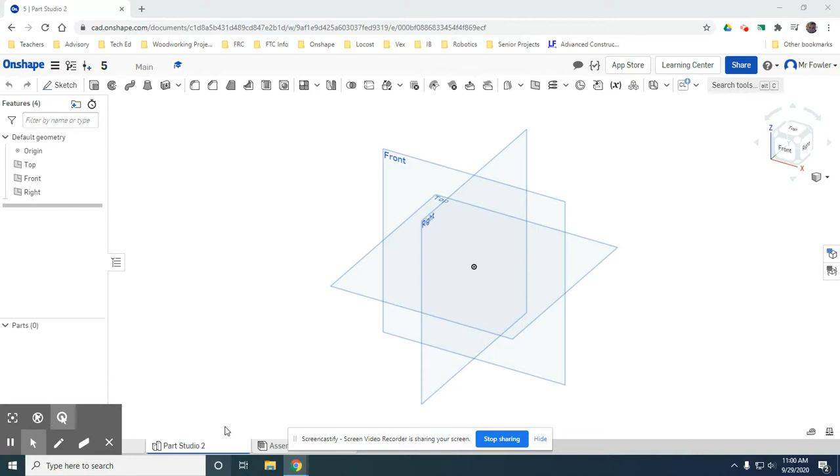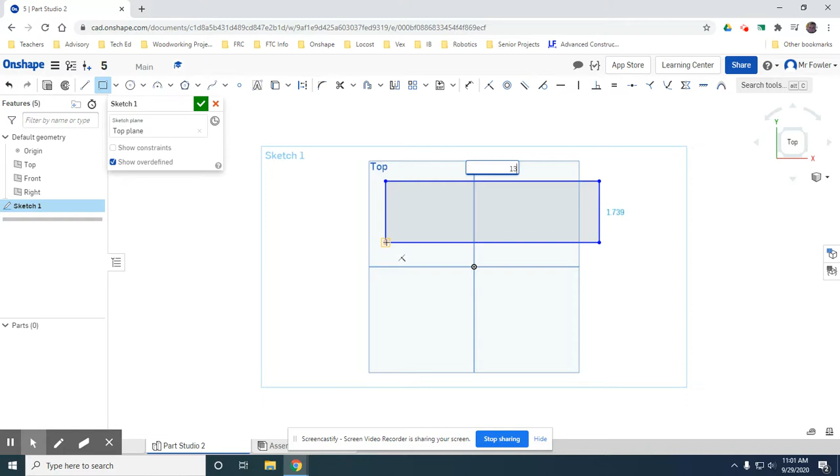Exercise 5 is a slot style bracket with 3 different holes. So we're going to get started today. Sketch, top, and normal to. Okay. Now I am going to start in a corner with my rectangle tool and go in this direction. This is going to be a rectangle with dimensions of 130 millimeters and 40 millimeters.

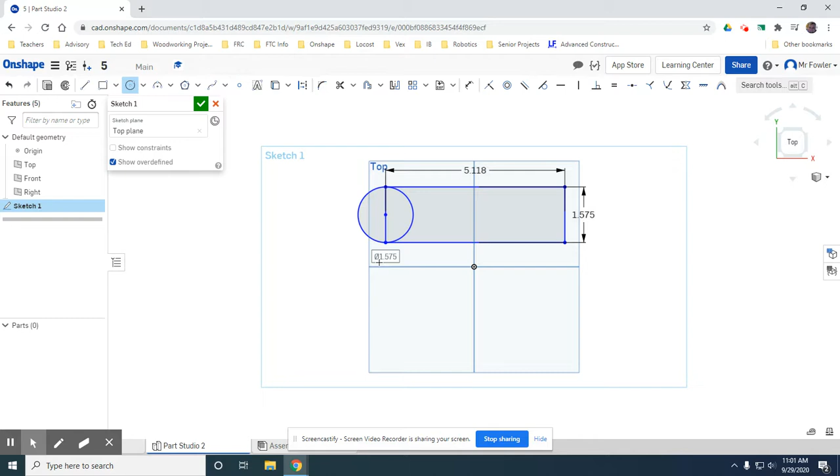Okay, and then on this end here, I'm going to do a circle on my midpoint, and that circle is going to be constrained tangentially to the top and bottom lines. Okay, that will also give me a radius of 20 millimeters. Okay, we're getting an error message here because we are over constrained, so I'm actually going to delete this measurement. Now I'm going to use my trim tool. I'm going to trim away this and these two.

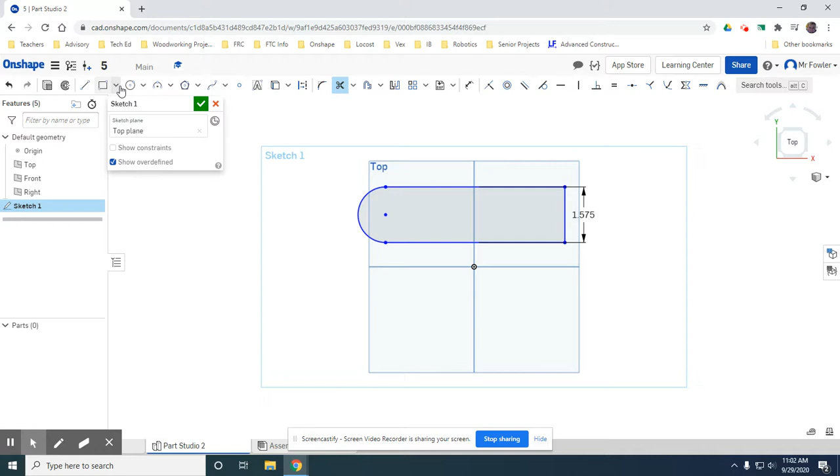Okay, so now I have to do a couple circles in order to create a slot here. The slot has a diameter of 20 millimeters, and over here somewhere we're going to have another 20 millimeter circle. And now we're going to actually dimension this so we can set these two apart a certain distance.

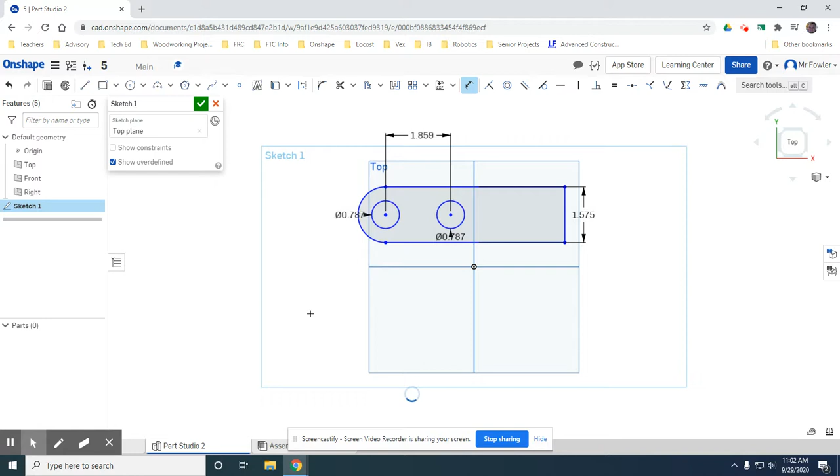So we have our dimension tool. We're going to click here at our center point and over here. It's going to give us a dimension. This dimension needs to be 40 millimeters. Notice that slides to where we want it. We're going to use our line tool. We're going to draw a line here and another line here. Okay, make sure those are horizontal lines.

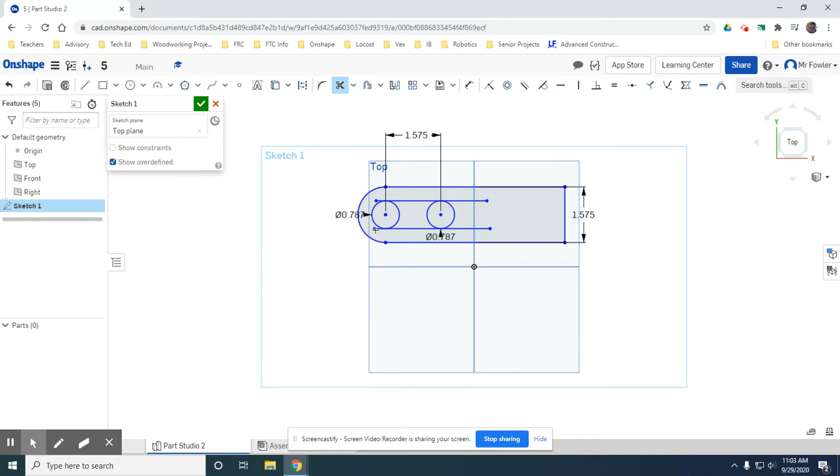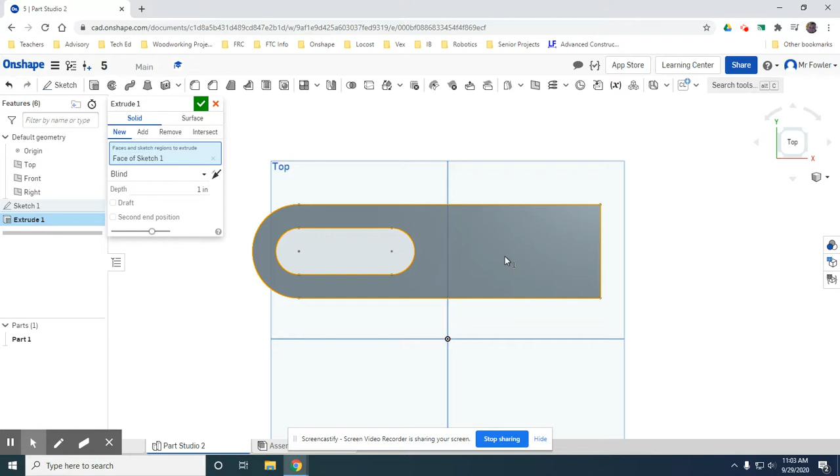We're now going to tangentially constrain those to our circle and to our circle. We're going to use our trim tool to trim away all of our extra line segments here. And now I'm going to zoom out. Okay, so that finishes this first sketch. So we're going to press the check mark to finish that. We're going to extrude this 10 millimeters, like so.

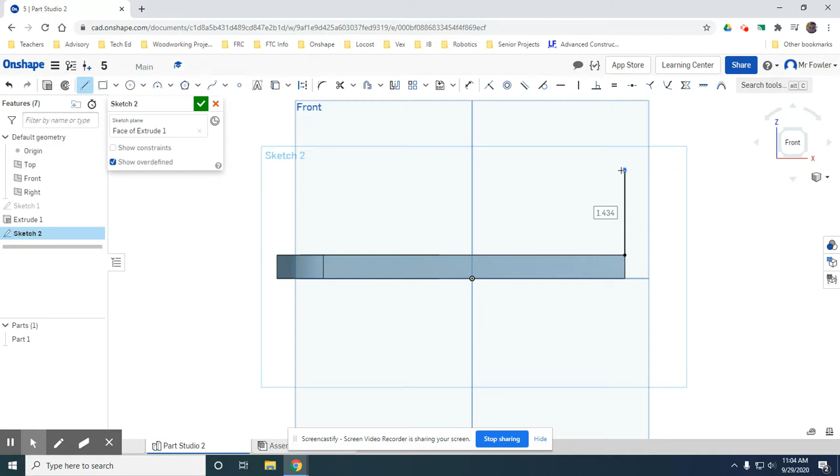All right. So now your upper pieces, you can draw a couple different ways. I am going to actually draw it on this plane, this way. I'm going to start in this top right corner. I'm going to go up 30 millimeters. Making sure that line's vertical. 30 millimeters. For now, I'm going to go over 50 millimeters. I'm going to go back down to

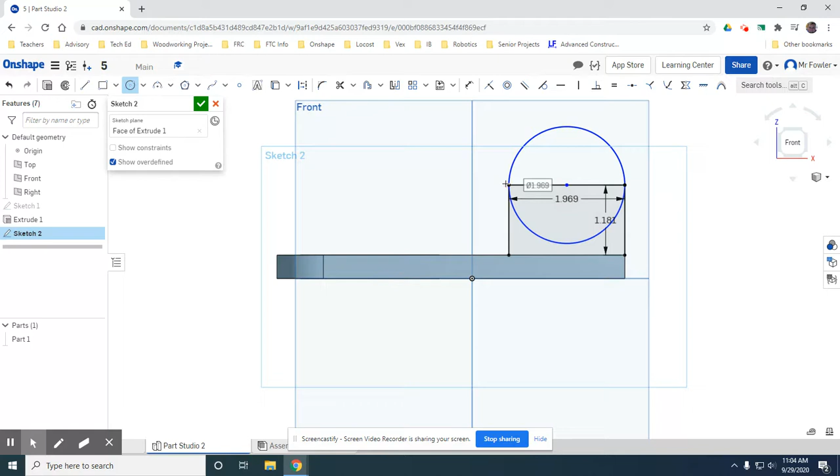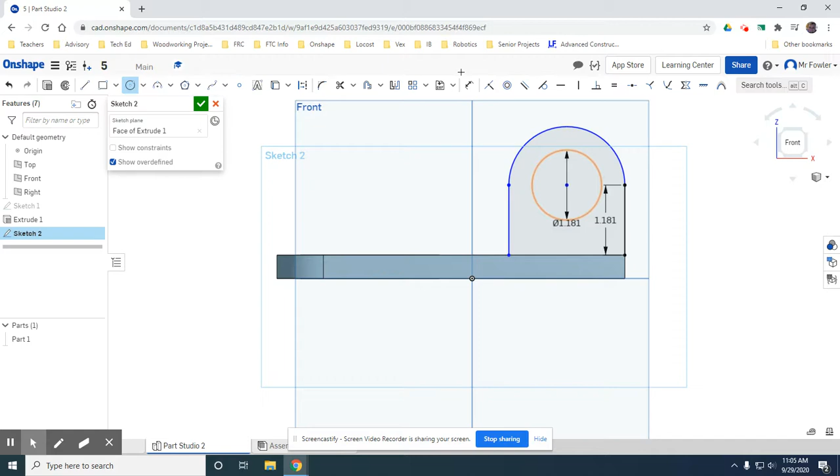here. Now I'm going to use my circle tool, find my midpoint here, draw a circle. Again, over constrained because we're tangential and we have a dimension which we don't need. So I'm just going to click on that dimension and delete it. I'm going to use my trim tool, like so. And now I'm going to put in a 30 millimeter diameter circle here. So, all right. So now we can continue.

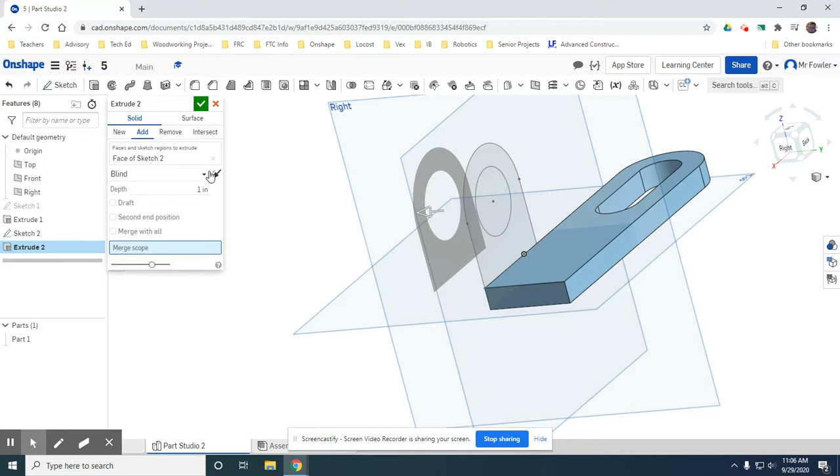So now that I've drawn this shape, I'm going to extrude this as an add in the other direction. My merge scope is part 1. My depth, I'm actually going to change to up to face. It's going to be this face here, like so. All right. So now I need to take a chunk out of here. So I'm going to draw a sketch on this plane.

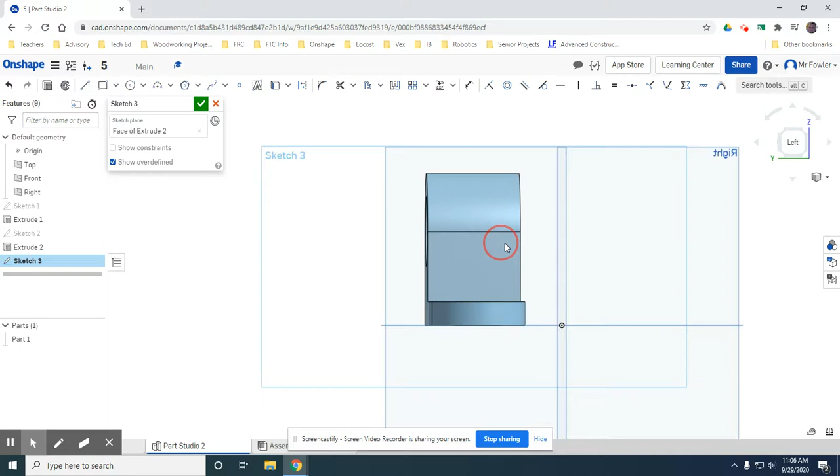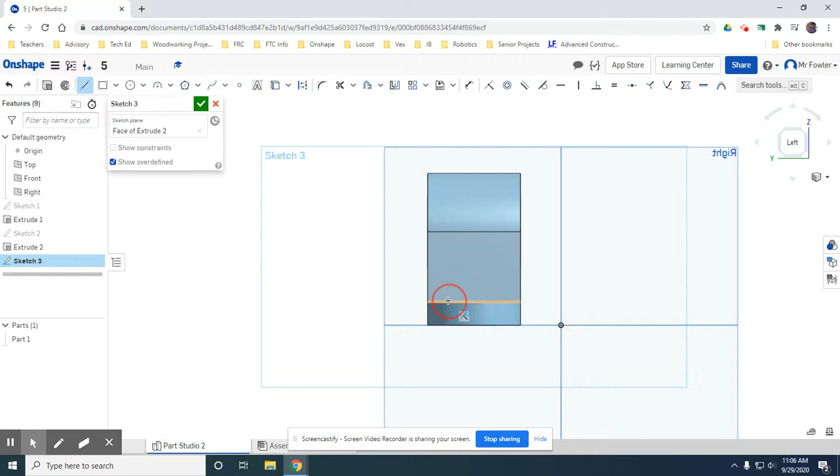And my slot there is 20 millimeters wide and 55 millimeters tall. So, line tool, find a midpoint. I'm going to go over to the left 10 millimeters, go up. And really this measurement doesn't matter. It's kind of arbitrary. As long as it goes up past the top of your arc, you should be fine.

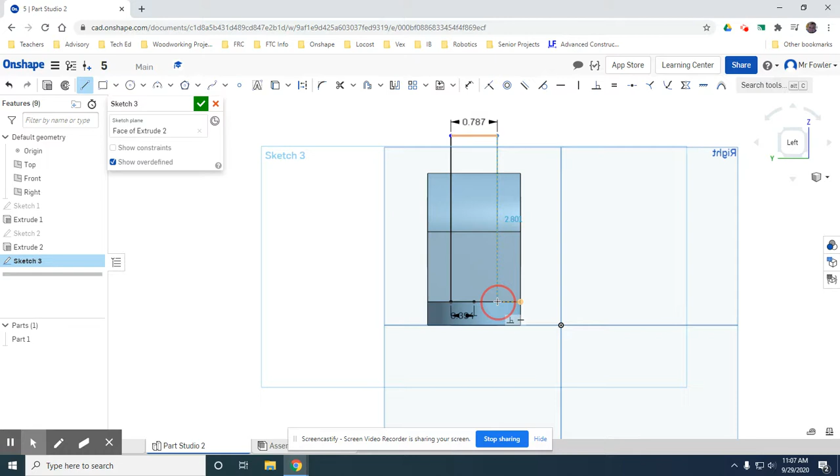I'm going to go to the right, 20 millimeters. Come down back to my horizontal line at the bottom and just close that back up. So now I have a spot here where I can finish my sketch, and I can extrude remove through all this and this. Okay, notice how that takes that slot right out. All right, and you are done.